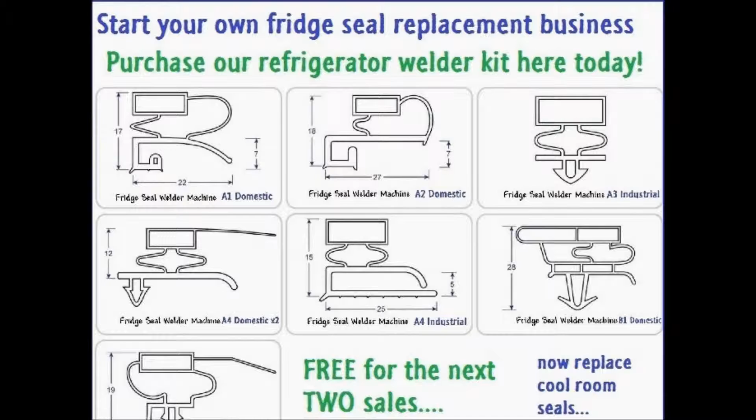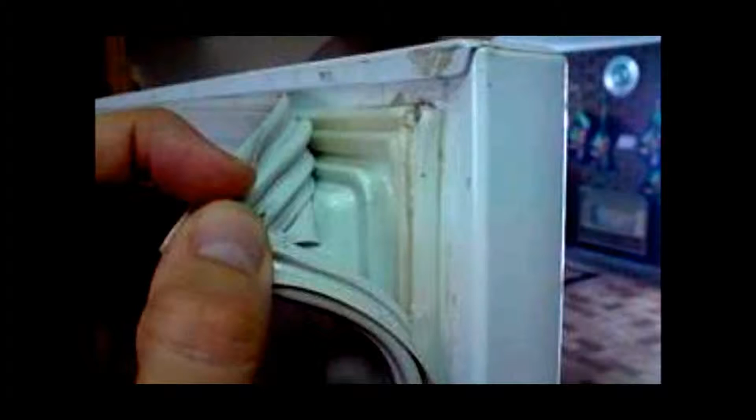Have you ever wanted to start your own business and work for yourself? Work your own hours, set your own pay. Each job takes under an hour and pays close to $200. Little manual labour and no formal training required. You can achieve this in your own fridge seal replacement service business, manufacturing and replacing refrigeration seals.

Make the fridge and freezer seal in your own van, fit and replace on the spot in the customer's own home in under an hour. Average cost of the fridge seal gasket rubber is $1.20 per metre, so under $5 in product cost to make both the fridge and freezer seal. Average price to supply and fit the seal to the customer's fridge and freezer is $160 to $200.

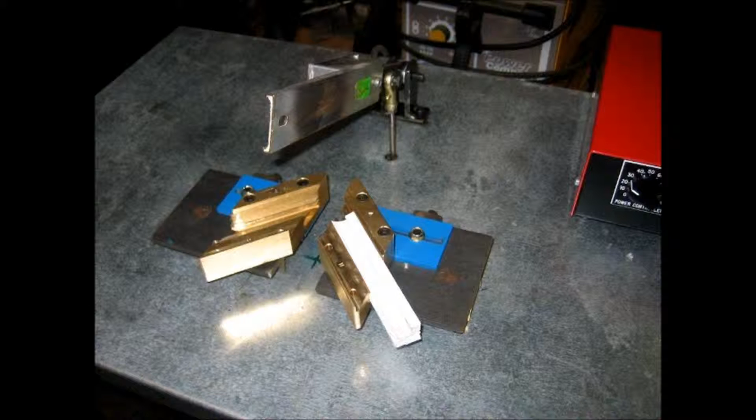I've successfully started, run and sold 4 successful fridge seal replacement businesses. Now I want to show you how. This site is dedicated to show you how to simply and cheaply start your own small business, manufacturing and fitting fridge seals. Listed are basic steps on how to start your business. Please peruse this site and feel free to contact us at any time.

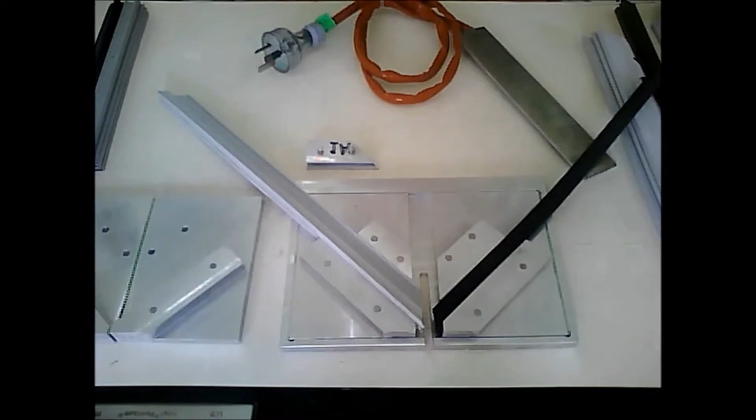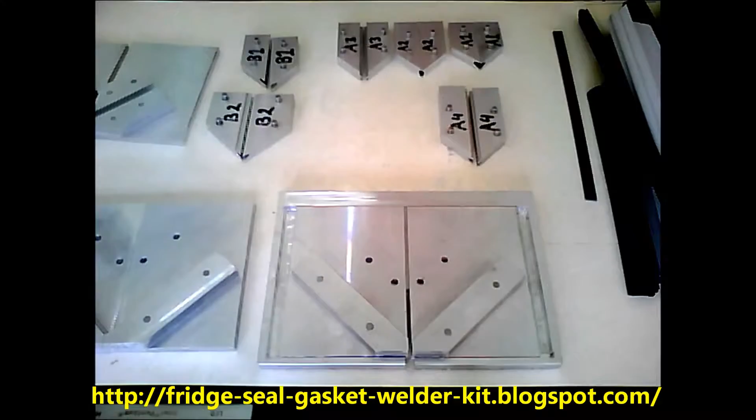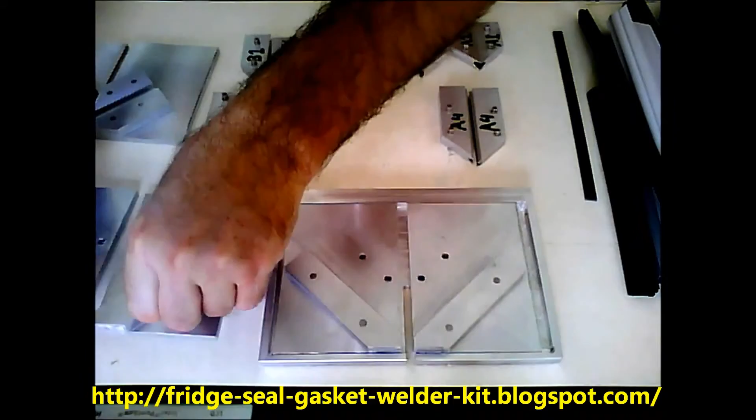This is an introduction video to the portable fridge seal welder kit. This is an introduction to the key components of the portable fridge seal welder kit. We have the internal left and right sides that slide into the main base plate. We have A, B, and C sets.

The A set comes with 4 individual internal jigs that basically just fit in and hold the rubbers in place. You've got to cut them at 45 degrees so the profile of the rubber you're using slides in there. A plate comes with 4 sets and does 90% of domestic fridge seals.

B plate is set up to do these 2 rubbers. It will do more than that, but A plate will not do these. So here's an example of why we use the different plates and different internals. These 2 are done by B2 and B1.

And then we have the C plate, and C plate is just for a rounded rubber that usually does not require magnets, which is 90% of all cool rooms. So if you're going to do a cool room, a walk-in cool room, you'd use C plate. It's only got 1 set. Again, it's removable. So once you heat it, take it below the knife, melt it, remove your newly formed fridge seal.

They are the key components of the fridge seal welder kit: 1 main base plate, 3 internal left and right, and numerous different profiles that will expand as we go. But as I've shown in the last video, even products sent to me from Europe and different places over the world are still fitting in and suiting the current profiles we have.

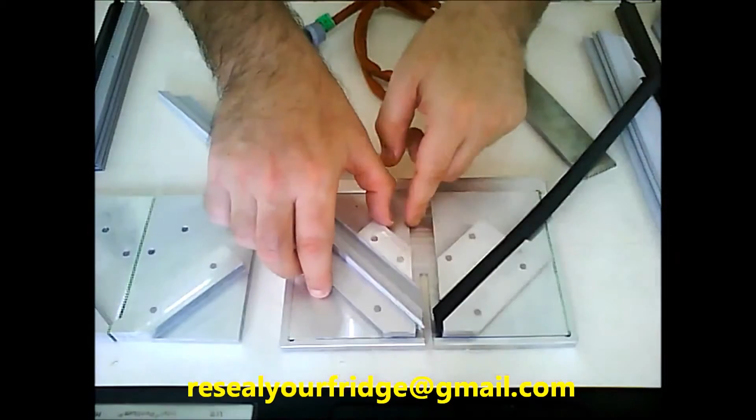What we found is on the A plate, this permanent groove structure covers 90% of fridge seals. So it's the internal plate that we've adapted to suit the different types that cover about 90% of household fridge seals. What I've displayed here is just the basics of the kit, which is the base plate, the internal plates, and then the internal dies.

On the internal plates, we have a die set that has replaceable inner sections to suit different rubbers. As you can see here, this particular set is the same, this is the same, but I have this rubber in here and this rubber in here. The only difference is these 2 internal particular dies. So if I take that out, I can show you that's A1.

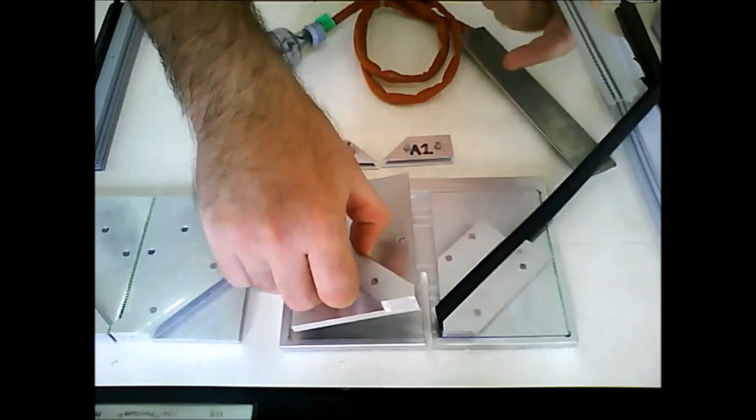We've labeled these to suit the base plate. The base plate is A. To do this particular profile is A1, and that will create that. This particular one is A3 to create the profile for this rubber. So again, we have an A plate using an A3, which will create this particular rubber. So there's the basic guide set that the jig set uses, and then the two internal plates sit in.

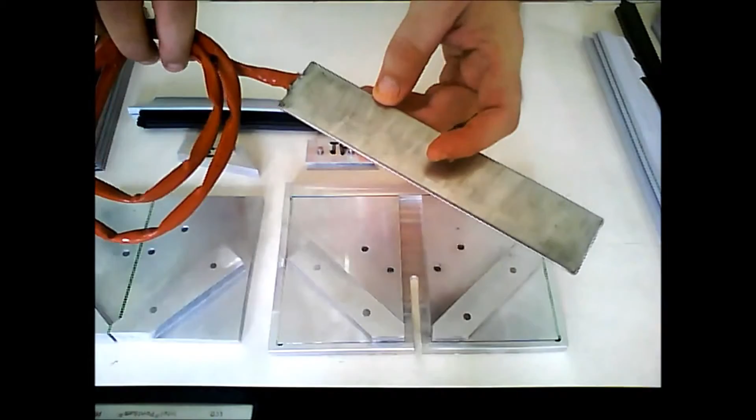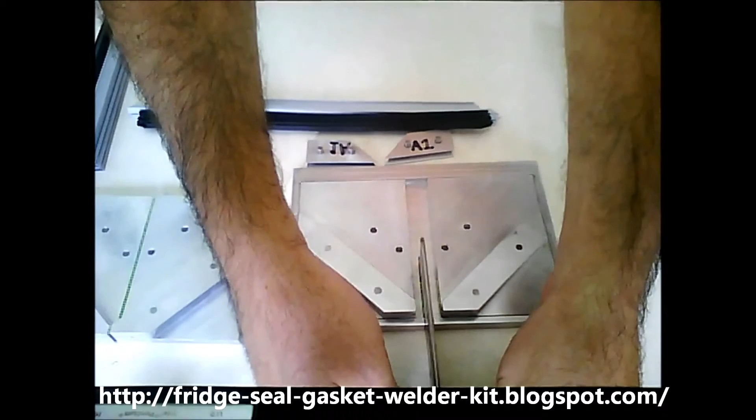Now we've got a groove cut out here, and that's to suit the heat blade. We recommend a 300 watt heat blade. They can be bought from Hotco Australia or actually at most major industrial electronic outlets. That would be fixed to the table and positioned here. So we'd set up a little bit of a screwed to the table situation, and then that would heat up,

and then basically what happens is they close with the rubbers included and the die set included. It heats the rubber and melts it. Now that would be stable on the table. Then this would pull down and you'd go like that. It would cool, and therefore your rubbers would be cooled, melted together. You'd take out the internal and you'd pull out the rubber set.

So as I said, that's A. We also have B and a C set for the industrial cool rooms.

Now I just wanted to show something extra here. Here are some rubbers I was sent from Europe, and I'm going to put them into the A set. The A set probably does 90% of household fridge seals.

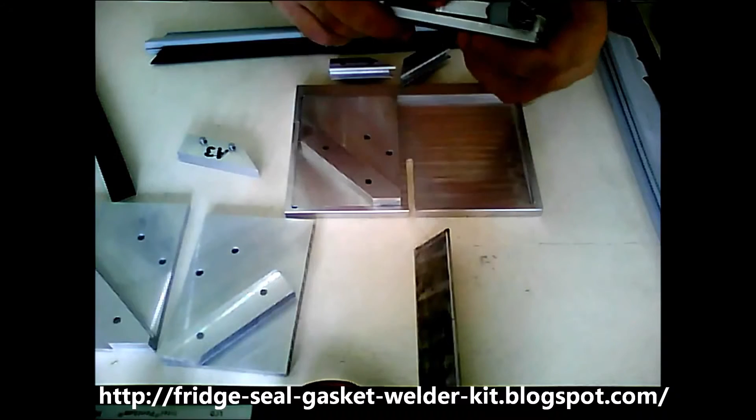So now I'm going to use A2. I found earlier that these particular two rubbers sent from Europe, that are not made for this particular kit, still work. You clip in the set and they're still in there, nice and sound. That would be cut, the rubber cut at 45 degrees, so therefore that would also weld. And the same again for this European profile.

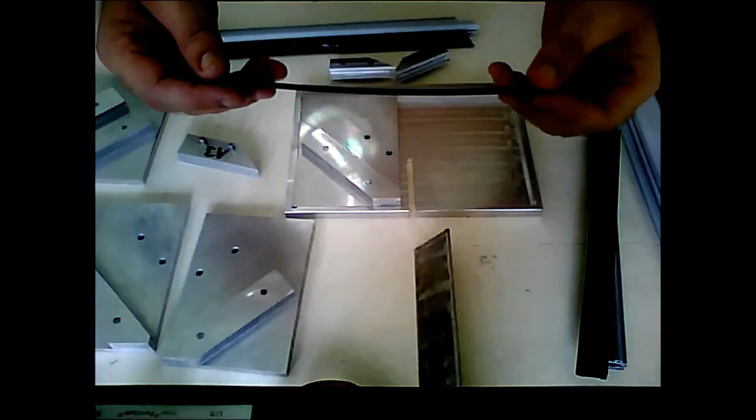Most rubbers use magnet, so you'd need a rubber gasket supplier that would detail you with the magnet. You'd need a heat blade, which is readily available, and this kit is basically a portable kit. It comes with the inner plates that fit into the larger base plate.

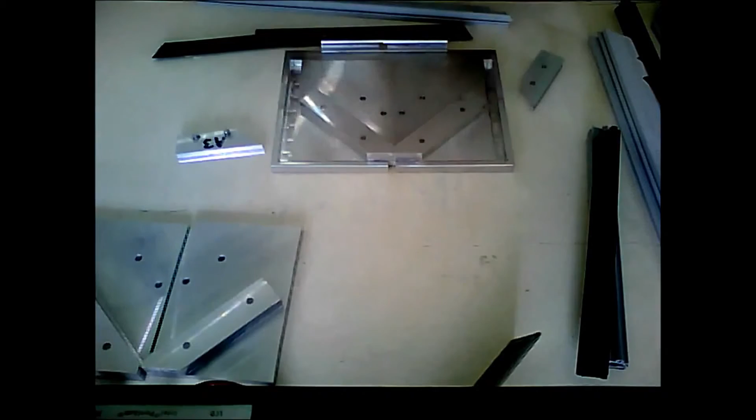You heat the rubber, separate it, go down below the blade, connect them, take out the internal, and then you trim and clip your newly formed rubbers.

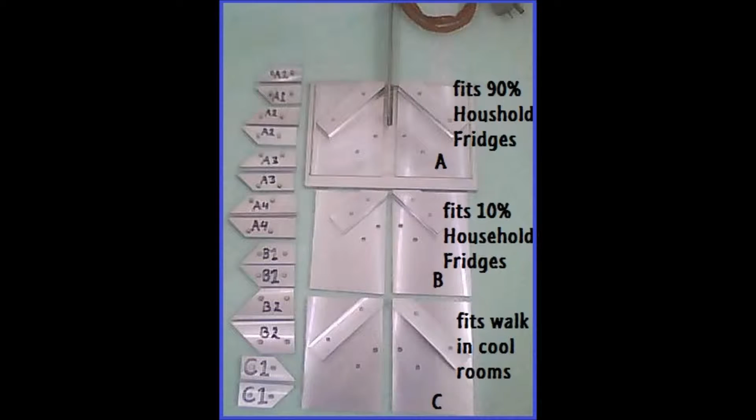Here are the basic steps to start your own fridge seal manufacturing and fitting service business. Basic step 1. Own a portable fridge seal welder kit so you can make your own seals at home, in your van, or at the customer's residence. The portable fridge seal welder kit welds the corners of the rubbers together to make the square fridge or freezer seal. So you measure it to size, cut the lengths, weld them together in the corner, and you manufacture your own fridge seal.

Basic step 2. Purchase stock of 4 meter lengths of the various brand fridge gaskets from your local manufacturer. All cities have a fridge seal service centre that manufactures gasket lengths for Fisher & Paykel, LG, Philips, and the other modern brands of fridge seals. Find out who your local manufacturer is, purchase the lengths off them, fit them into your van as storage, and the fridge seal welder kit can weld them together to make the squares and rectangles that make up a fridge or a freezer.

Basic step 3. Use our advertising samples to promote the benefits of replacing the customer's fridge seals and the importance of your service to the community. We have a whole plethora of workable, usable, successful promotion items for fax blasting, for flyers in letterbox drops, for sign writing, for bus signs outside schools, and most importantly, the sign writing that goes on your vehicle. So we will help you with all advertising and the appropriate statements, facts, figures, benefits regarding why someone should replace their fridge seal, and we'll supply that free on the website to get you up and started.

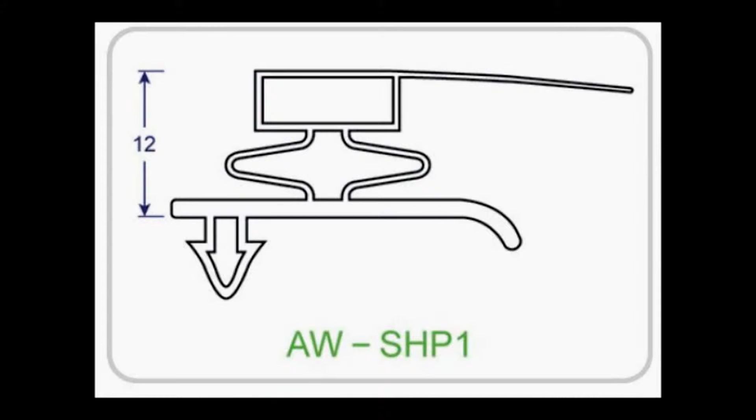Basic step number 6, start taking customer calls and replacing their fridge seals immediately. This is a cash business and should start generating business on day 1. Minimal costs and maximum income. You can earn up to $1,000 a day just by doing 5 jobs, paying $200 each. So that's 5 hours of work, paying $200 per job, and then you've got to take away your costs. Costs tend to be the product cost of the gasket, the cost of your petrol, and the cost of your advertising. That just about is it.

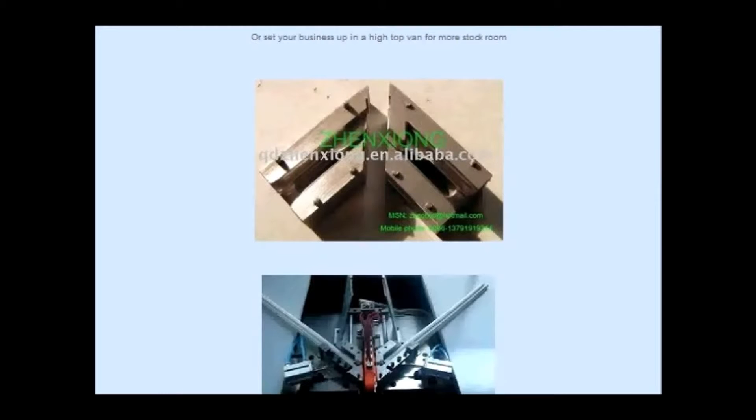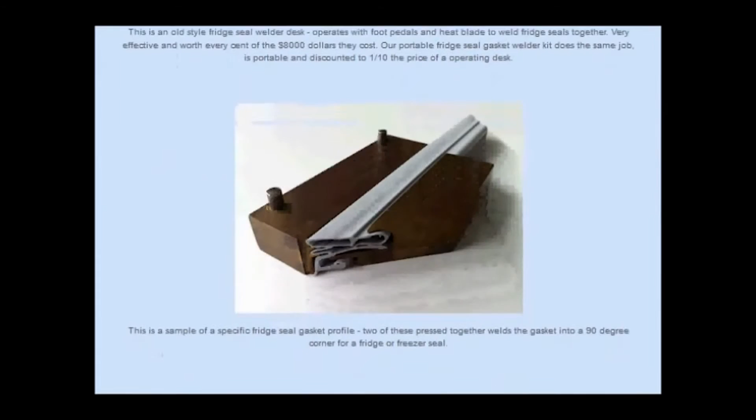So basically, buy a van, start your own small business today. Or if you're currently a white goods manufacturer, white goods repairer, add this to your range of duties you can do. Provide fridge seal replacement. These are the current machines. Too big. We've made ours a dynamic, small, portable machine that has the jigs suitable for the LG, Westinghouse, Sharp, Fisher & Paykel, all the range of fridge gasket designs that the different companies offer.

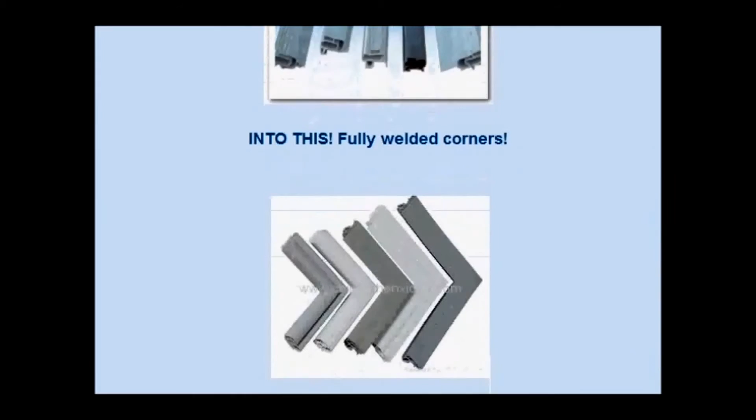So it's portable, cheap, reliable, and creates a backup jig for your current setup or operation, or offers a new opportunity to expand your business as this is portable. It could be taken on a motorcycle, it could be put on a workbench, it could be done within a vehicle. It's very, very small and allows you to weld fridge gasket lengths as these are, into welded corners. You cut the corners at 45 degrees and our welder kit melts them to become a 90-degree weld.

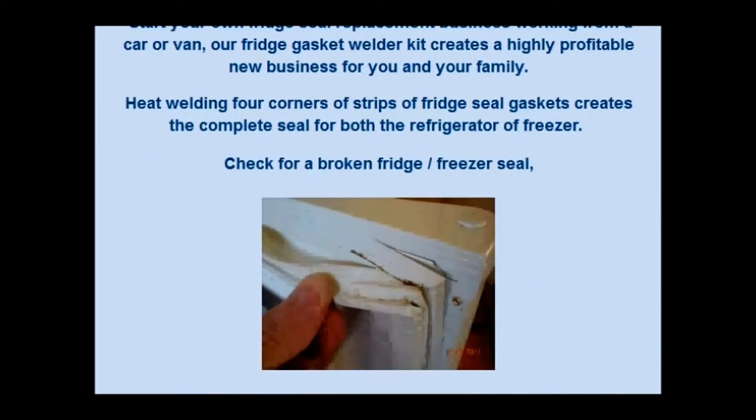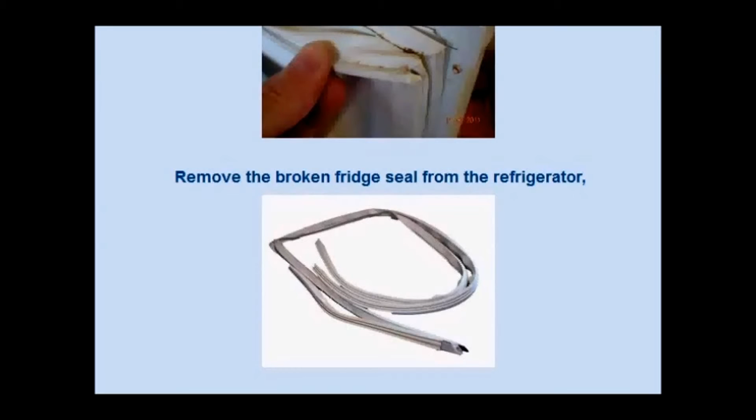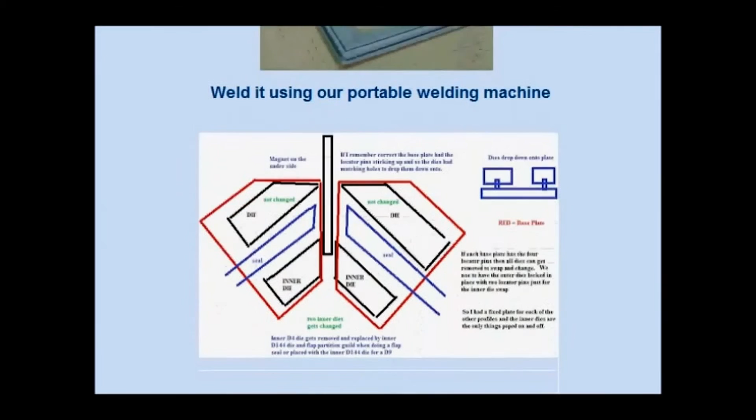If the fridge is over 2 to 5 years, very often cockroaches, messiness starts around the fridge seal, and once the fridge seal is damaged, it costs more electricity, the milk and foods go off, it's a health risk. Procedure: remove the broken seal, check which gasket profile to use, manufacture using our fridge seal portable welding kit, a machine that welds the fridge gaskets together to make a completed fridge seal. Remove the old seal, fit it, and you're done.

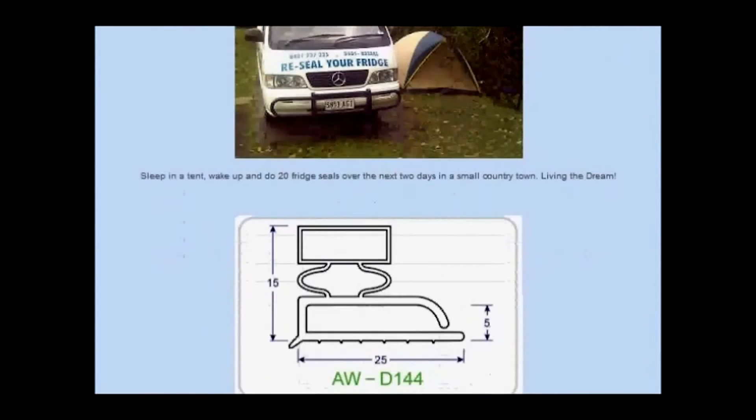So get your van, put the sign writing, do a fax blast, do some advertising, and fit these profiles onto your clients' fridges. Hotels, motels, schools, how many clubs, pubs, sporting locations all have fridges? The answer is they all do. How many houses have fridges? They all do. How many farms have fridges? They have an average of 7 to 10 fridges.

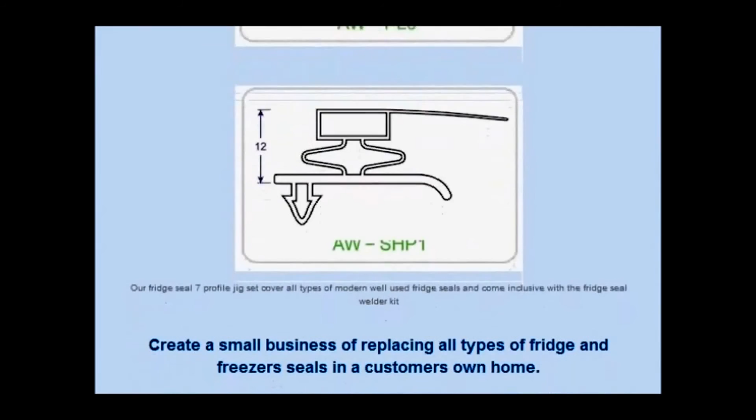So create a small business replacing all types of fridge and freezer seals in the customer's own home. Get a client to call, you visit, you measure, you make the seal on the spot and fit. Either sell the seal or replace it yourself. This would work well with a new person starting a small business or a current white goods repair business wanting to add and get more income.

Here is some method on replacing a fridge seal. Best bet is to buy our portable fridge seal welder kit. Find the local supplier and get some lengths. Manufacture the seal to suit your fridge and replace your fridge first.